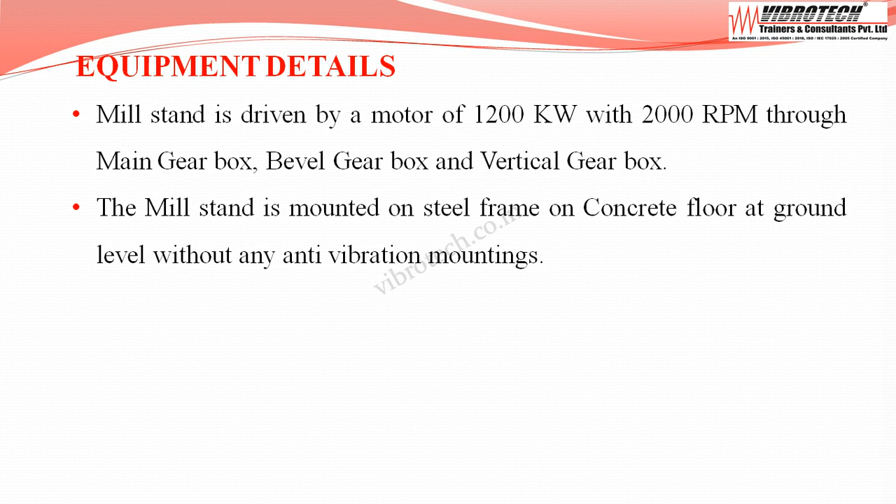Mill stand is driven by a motor of 1200 kilowatts with 2000 RPM through main gearbox, bevel gearbox and vertical gearbox. The mill stand is mounted on steel frame on concrete floor at ground level without any anti-vibration mountings.

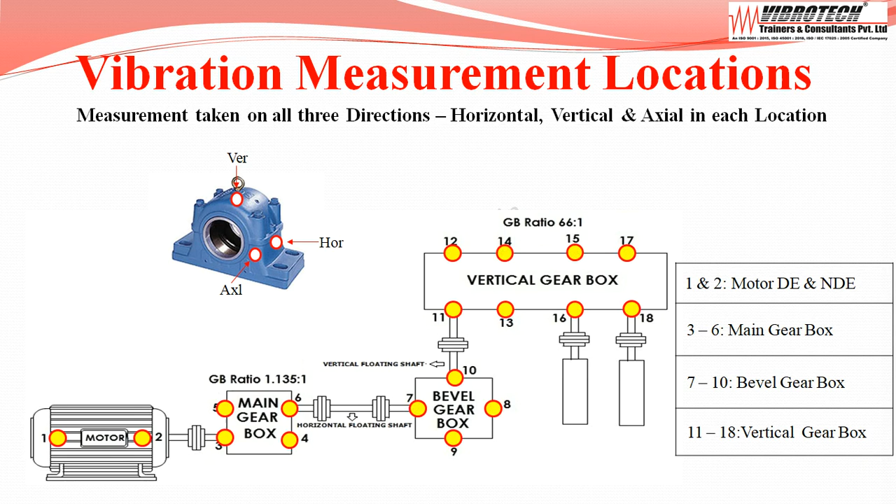Vibration measurements are taken in all three directions: horizontal, vertical and axial, in each location. Measurement locations are motor drive end and non-drive end bearing, main gearbox bearings, bevel gearbox bearings, vertical gearbox bearings. Vibration amplitudes collected are displacement in microns peak to peak and velocity in millimeters per second peak.

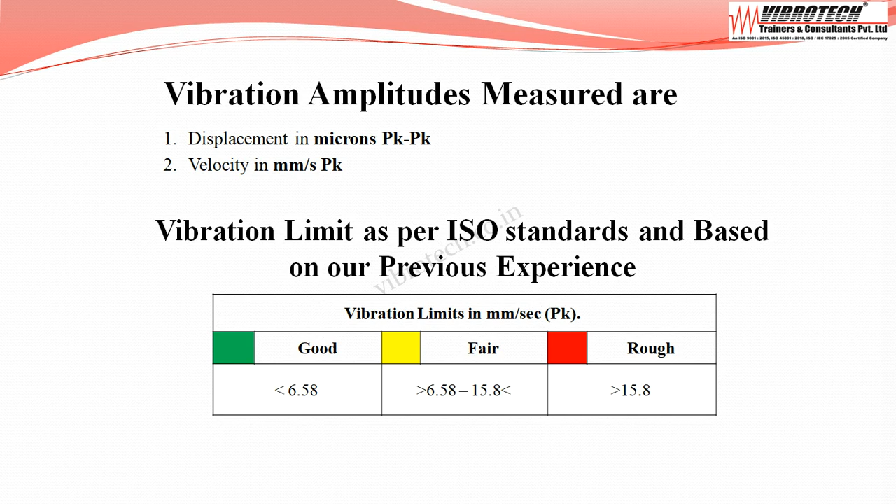Now onto the vibration limits. As per ISO standard and with our previous experience, when the velocity falls below 6.58 mm per second peak, it's considered as good. When the velocity falls between 6.58 to 15.8 mm per second peak, it is considered as fair. When the velocity falls above 15.8 mm per second peak, it is considered as rough.

Initially, vibration values are measured. Highest vibration values recorded at motor, main gearbox, bevel gearbox and vertical gearbox are highlighted. At bevel gearbox output shaft vertical direction, velocity fluctuating from 70 to 82.1 mm per second peak and displacement fluctuating from 800 to 1485 microns peak to peak. Initially, the equipment is in very rough category.

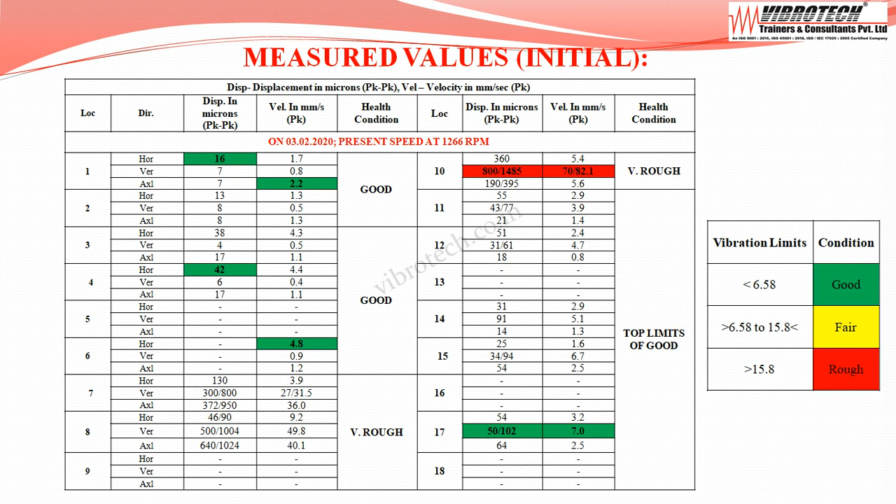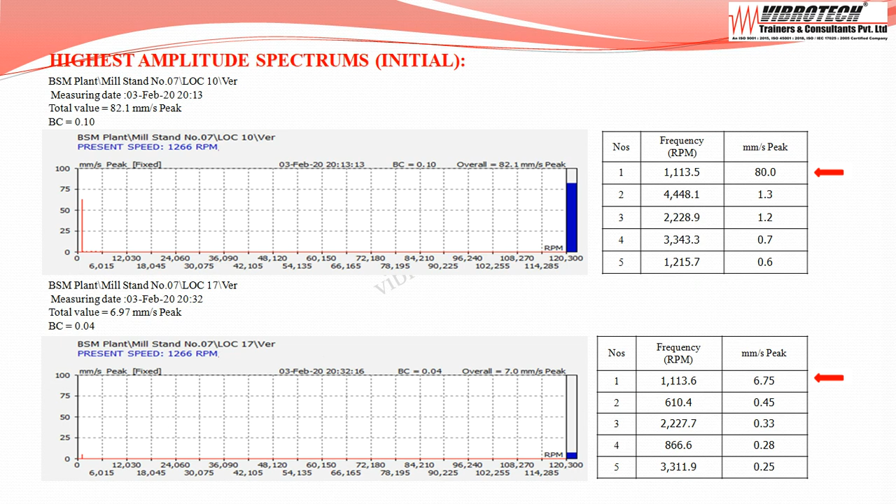Looking at spectrum of location 10, dominant peak value of 80 mm per second noticed at 1 times of running RPM, making equipment health condition very rough, since the equipment vibration levels are significantly high when the equipment was operated at motor speed of 1266 RPM. Based on analysis, misalignment indicated between main gearbox to bevel gearbox. Bow in the floating shaft indicated.

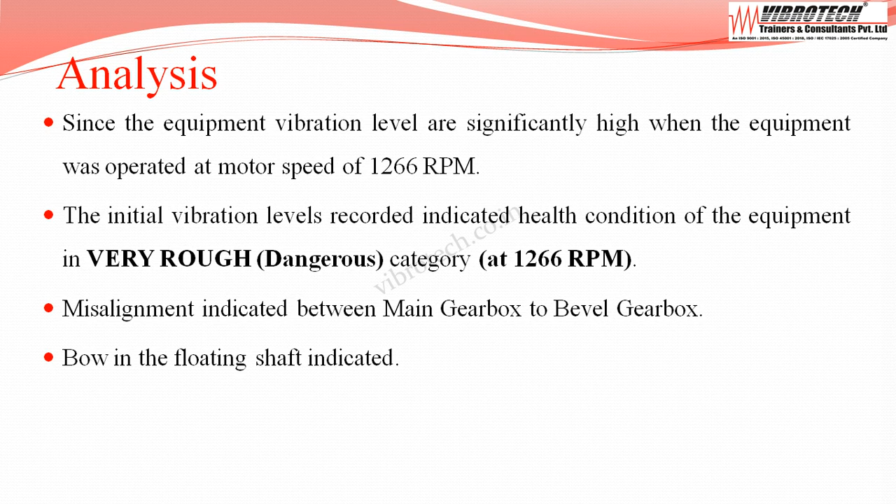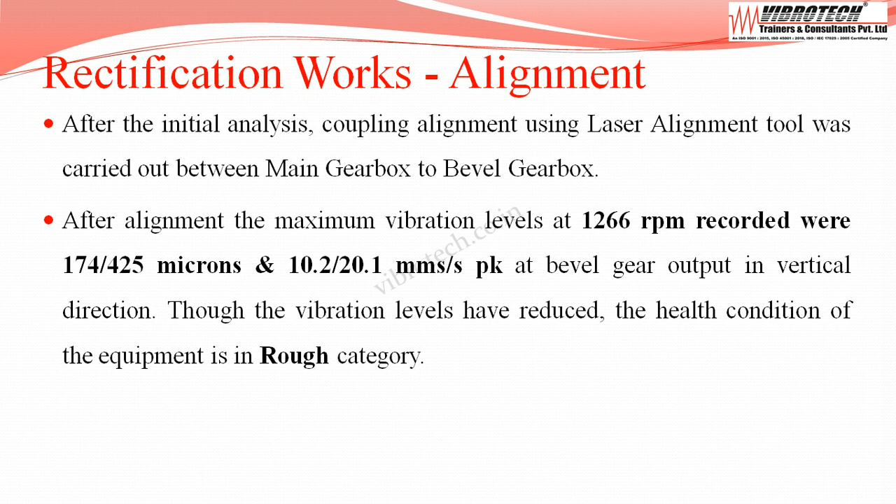Rectification works carried out: coupling alignment using laser alignment tool was carried out between main gearbox to bevel gearbox. After alignment, the maximum vibration levels recorded at bevel gear output in vertical direction at 1266 RPM were displacement fluctuating from 174 to 425 microns peak to peak, and velocity fluctuating from 10.2 to 20.1 mm per second peak. Now the health condition of the equipment improved from very rough to rough category.

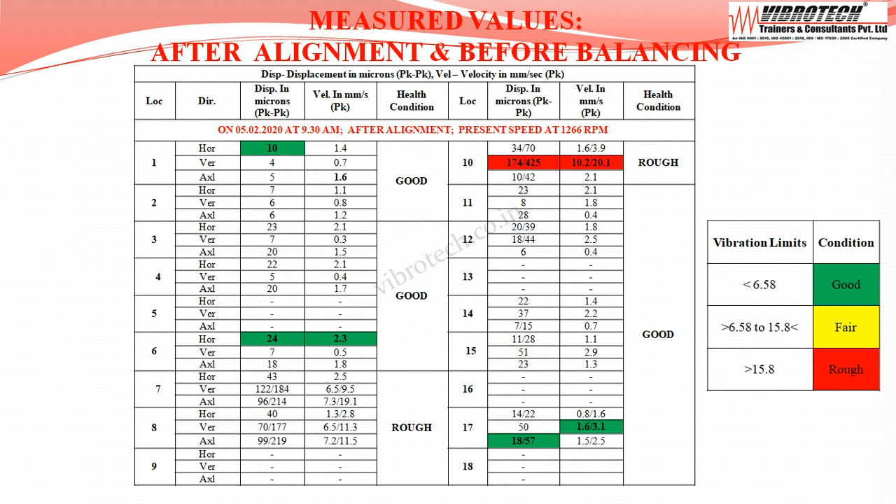After alignment work, phase analysis was carried out, and the equipment was taken for in situ dynamic balancing with our 3-channel vibration analyzer cum balancer, model X5 Mark III. A correction weight of 1740 grams was added on the horizontal floating shaft.

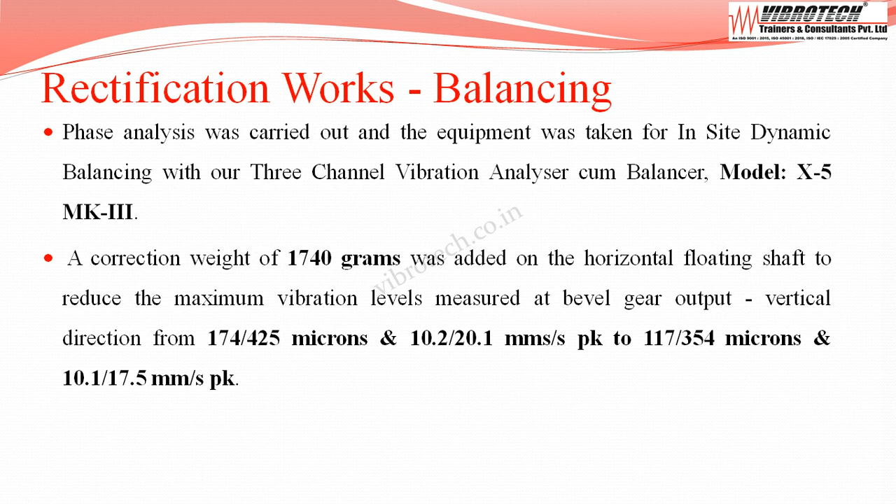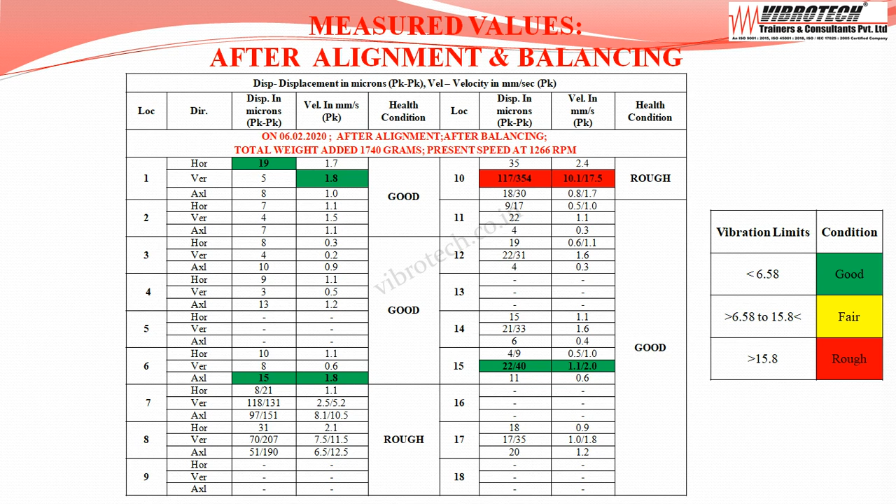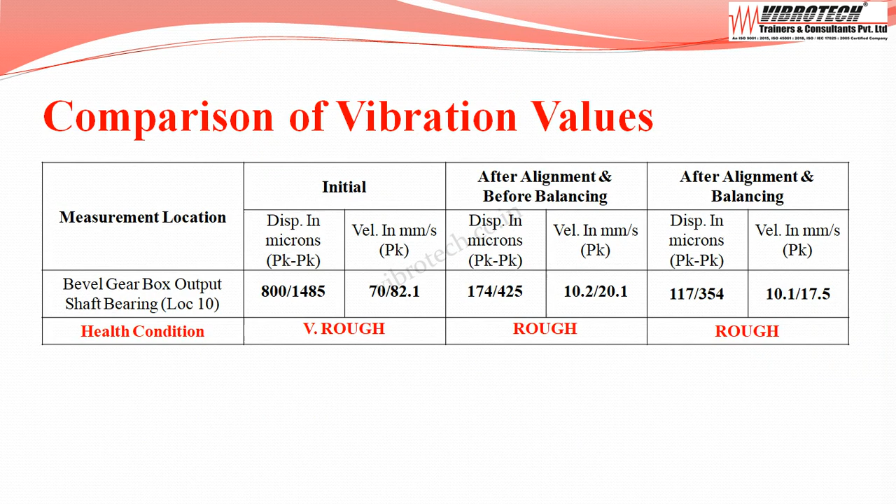Conclusion: further reduction in vibration levels through balancing or alignment is not possible in its existing condition, as excess bow in mill number 7 horizontal floating shaft is indicated. It is advised to replace the horizontal floating shaft before taking it for continuous operation, as vibration levels will be higher in on-load condition.